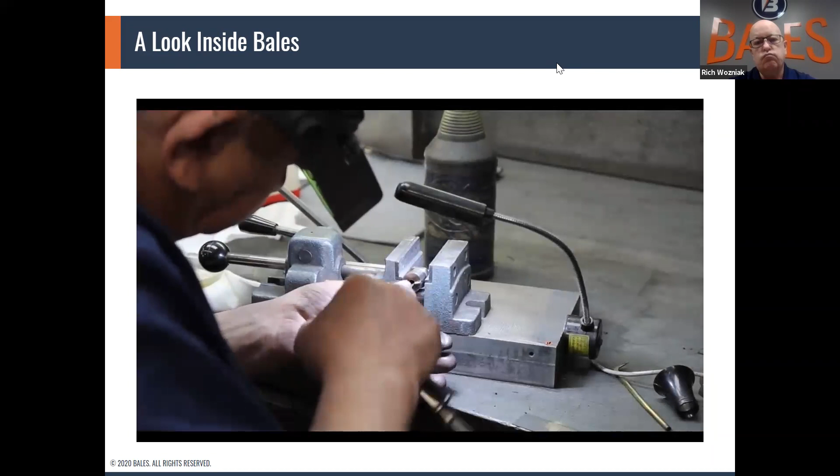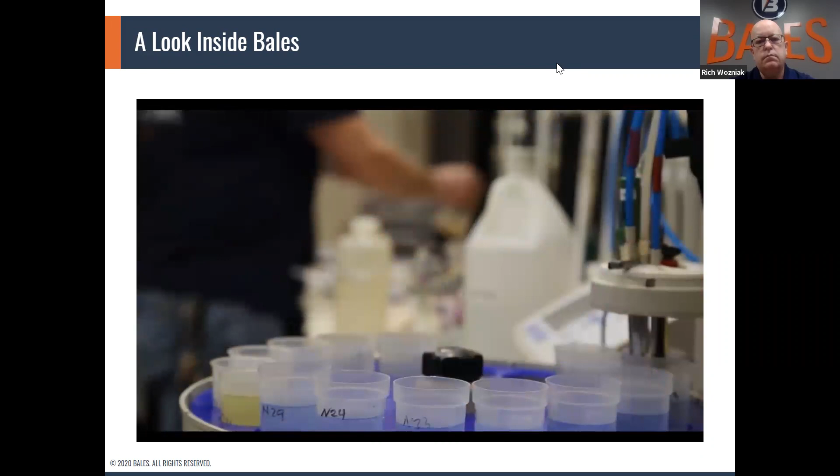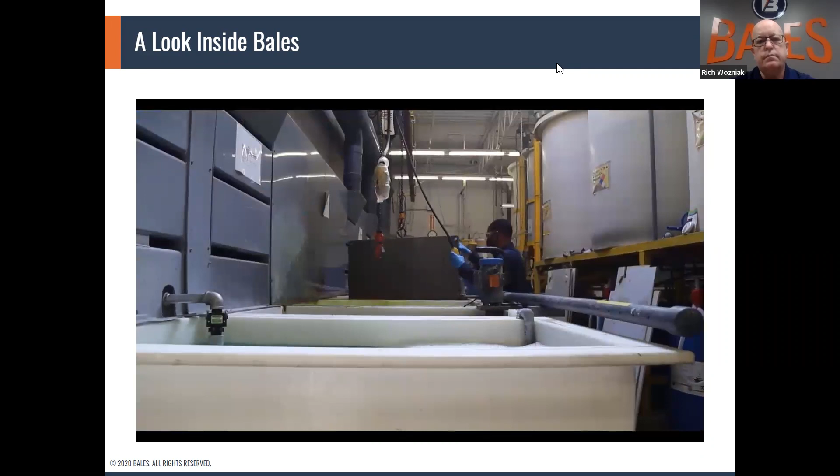Okay, so we'll get into the presentation, the meat of it right now.

Oops, my bad. I'm Stacey Bales, president. The solutions we offer, I apologize for that. I got a sticky finger on my laptop here.

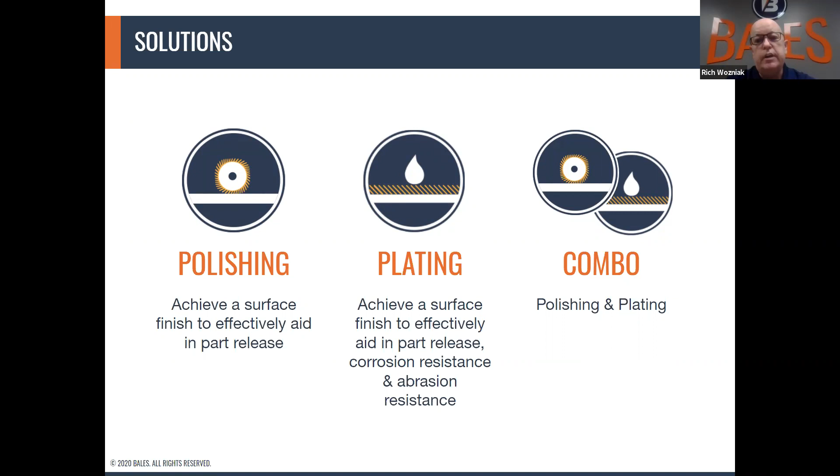What we offer here are some solutions, whether it be polishing, plating, or a combination of both. Polishing, effective part release, or just designed to achieve a certain finish. Plating to effectively aid in part release, corrosion resistance, abrasion resistance, or a combination of both. Some applications, especially materials that we run nowadays, you may actually need the plating to help protect your components.

We'll jump in. Polishing, there's 4 types of polish finishes, from your A1, A2, A3, which is your diamond polish, your paper, which is your B1, B2, B3, your stone finish, your C1 through 3, and of course your dry blast, which is typically a glass bead media as a D1, down to a D3, which could be an aluminum oxide blast. Here at Bales, at the blast end, we can meet any of your needs, whether it be a hybrid mix or not.

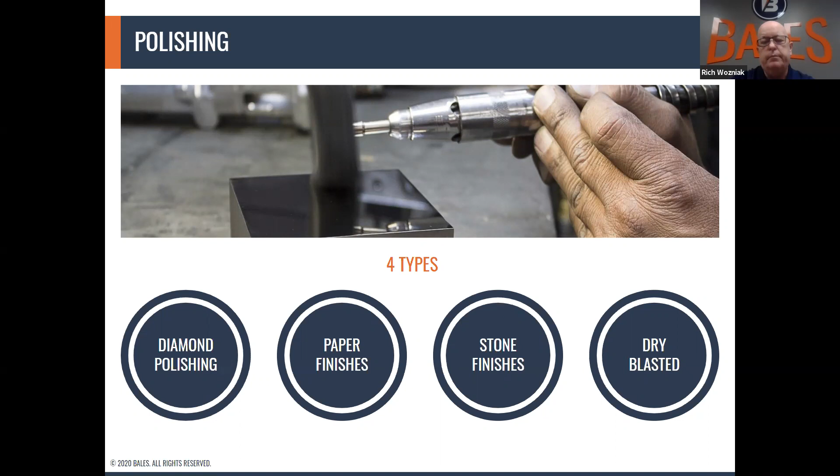First off, diamond polishing. It takes time and skill to achieve this finish. This finish is very technical in nature, depending on where we're starting to get to this finish, whether it be just a straight mill finish or a ground finish, you still have steps in order to achieve it, utilizing the stones to get you where you need to go, and then finalizing with the different types of diamond compounds. This finish can be used alone with chrome or nickel, or by itself.

Some folks don't actually like plating, but with the materials out there today, protecting your substrate is important, protecting your finish is important, and sometimes you may need a combination. It enhances part release, with a nice quality finish, aid in part release is critical. What you see is, maybe you've got a part and you're ejecting, your direction of pull is either horizontal or vertical. You want to, even though it's a high polish finish, still kind of polish in the direction of draw, just to make that part come off even easier, or get the certain finish you're looking for.

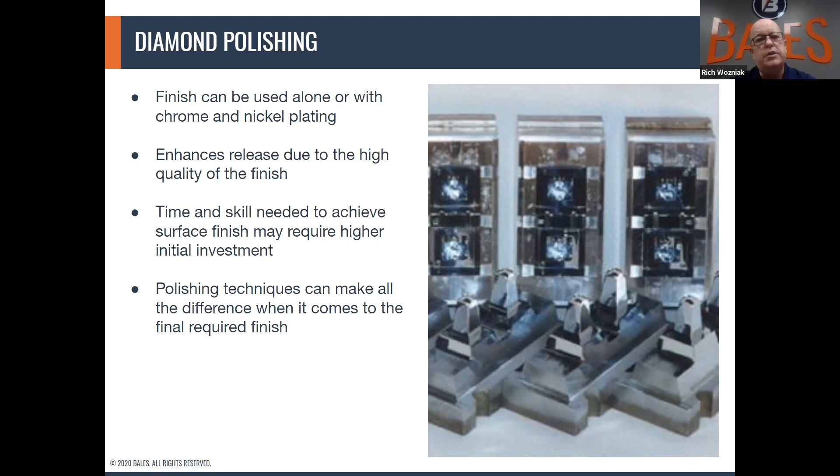But this is the most refined finish, and once again, it's on the A scale of the SPI scale. This finish is also great for, like, if you're running polycarbonate material or other types of materials similar to that. We could easily guide you in the direction of the finish you're looking for. However, we know out there, parts are designed by the end user, and you may not have a say in it. You may be stuck with a certain finish that may not lead towards the proper release you're looking for. But however, we can achieve all of those any way we can.

Next finish would be the B finish, paper finishes. You're basically using different types of grit of emery paper. It's the second most refined finish. This can give you a slightly reflective or glossy look. You've got to be a little careful here, especially if your call-out may specify some sort of gloss level on a part you're trying to hit. So you just got to make sure those things are taken into consideration when you're choosing the finish, whether it be at Bales or even in your own shop or somewhere else.

This also provides good release. It's not as good as your A finish, your diamond finishes, but what can happen sometimes with a diamond finish, you may create a vacuum effect depending on how the part is designed, so it may actually stick more. So there's just some things you need to think about. Usually an expert at a plating or polishing shop can guide you in the right direction and help find what will work for you if your customer isn't calling out a certain type of spec. So we could easily take care of that.

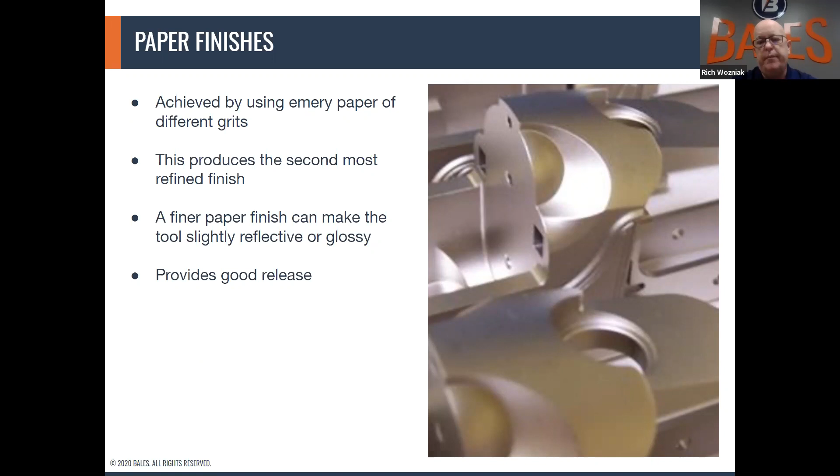Moving right along, the next refined finish is our stone finishes. Now you're in the C scale of the SPI. Me being a former mold maker, this is probably about as far as I can take a polishing. It easily removes cutter marks, things like that. It provides adequate release, however it's not as refined as your B's and your A's. It will give you minimal gloss or shine. This is also good for, say, your non-show section, the backside of your part where it's not visible. It's always good if you can get away with sneaking in a maybe less effective type of finish on the backside of your part.

It's a lot rougher, definitely. But with certain stones that are out there, you can achieve a really nice finish, especially if you have a little part to stick in, you put a little draw polish stone on there. It definitely can help aid in releasing your parts. Also, if you're doing some automation equipment and you have a channel or something, you just need to make sure everything's smooth, kind of get rid of all the imperfections that may have happened in machining, or just blend a transition area. A stone finish will definitely help aid, and say if you're running like a bushing through a feeder bowl into a rail that goes into automation end-of-arm tooling, whatever it may be, it definitely can help you there. Once again, this is non-aesthetic parts, really where you're looking for that stone finish.

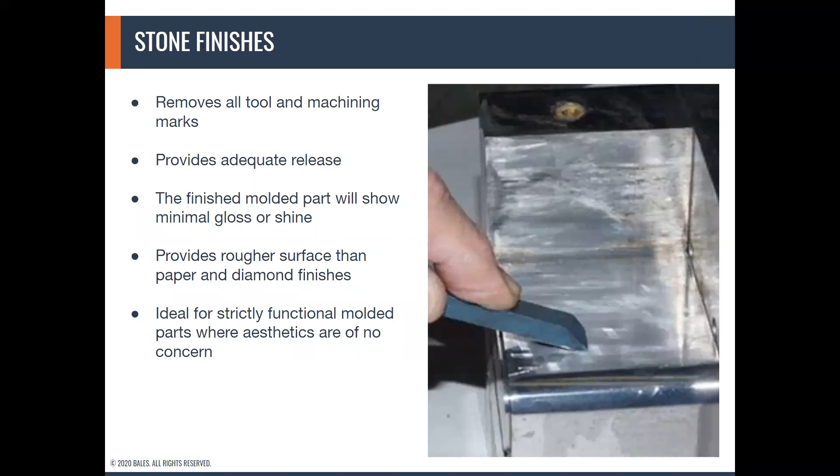Now we're down to the D scale on the SPI scale: D1, D2, D3. There are other blast medias out there. You can almost come up with your own hybrid blend in order to give a various texture or a stipple, or even a look that you're looking for. Typically glass bead blast is number 11, and that's our D1 on the SPI, and then down to a D3 aluminum oxide.

What's nice about the blast is, if you have some machining imperfections, you can easily go in there and give it a light blast and kind of hide some of those imperfections. Maybe you need to run some samples and you don't have time, but you want it to look like a fairly decent part. You can easily put a blast finish on something and then touch it up later or whatever it may be. But it's definitely a really good tool to use for camouflage and some defects.

The rougher the surface, the rougher the media blast, it will act as a kind of part retainer, helping keep that on one side of your tool. You may have a sticking problem where it's sticking to the wrong side, that's a whole new problem. So instead of putting undercuts and detents and kind of scratching up your part or disfiguring it, you may want to just give it a little bit of a bead blast look. This may aid in helping you shift that part from sticking from one side to another, especially if you're running an automated system and you've got end-of-arm tooling coming in there, the last thing you want is for it to stick to the wrong side.

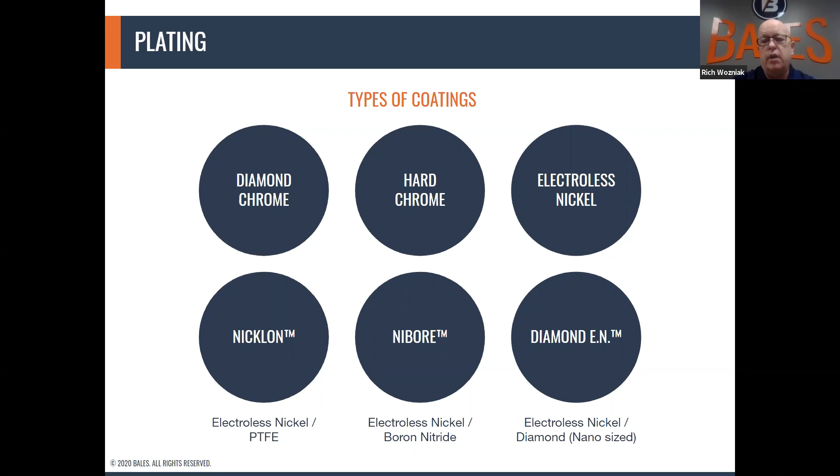Diamond chrome. Everybody's running material that's high glass filled, high fiber filled, 40, 50%. We even got a request where somebody had 55% fiber filled. 85 Rockwell, it's going to take the abuse - let the coating take the abuse, protect your substrate. That's the key here. With all these weird materials out there, you need to protect your investment. Some of these components can cost thousands of dollars, and the last thing you want to do is have to re-weld after a certain wear area. This way, if you identify your wear areas and have a coating on there, whether it be Bales or anybody else's, you can easily strip and replate and protect that substrate. That's the key right there.

Going into it, diamond chromium matrix is co-deposited - like I said, 85 Rockwell, it's an ultra high dispersion of diamond mixed into the bath. What's nice about the chrome, it's only applied at 130 degrees Fahrenheit. So if you have a component, we're definitely not going to distort any of your thin walls or thin pins or any of those details. You may ask, well, how do you run these? The chromes all run at 130 degrees F.

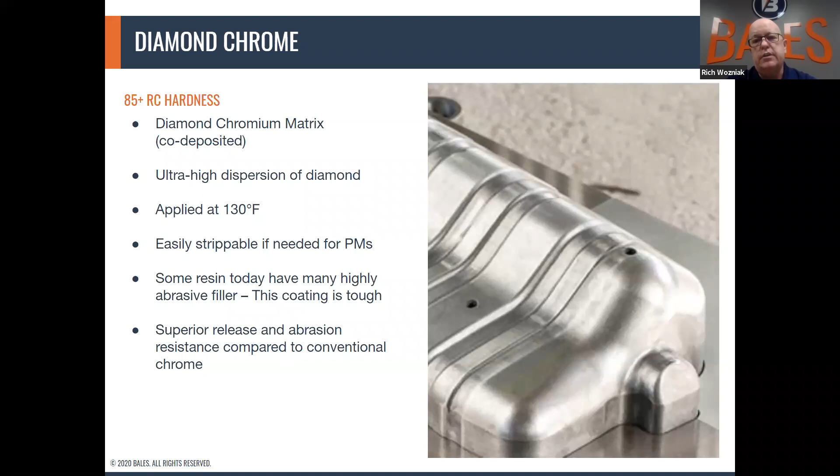Any of the coatings we have here, whether chrome or nickel, can easily be stripped - we can definitely take care of that for you. Like I said, these resins out there today, it's really important to protect your substrate. When I was on the bench back in the day, I used to think if a tool's built right, you don't need plating - if you build it with the right amount of draft and all the bells and whistles, you don't need that. That might have been the case years ago, but today, with the more different materials that are fiber filled, glass filled, whatever it may be filled with, wood filled, you definitely need to protect yourself. It's important, not only with our coatings, but anybody's coatings, to protect your tooling.

What's nice about the diamond chrome, it's also good with release - 0.15 coefficient of friction. It's definitely pretty slick, so it also aids in resin flow if you're running a part with weird areas where your mold flow test may have shown it's hard to get in. Definitely with a coating on there and a slick surface, it will aid in that resin flow, and it may actually enhance your cycle time with your injection speeds, getting it from point A to point B to totally fill out your part.

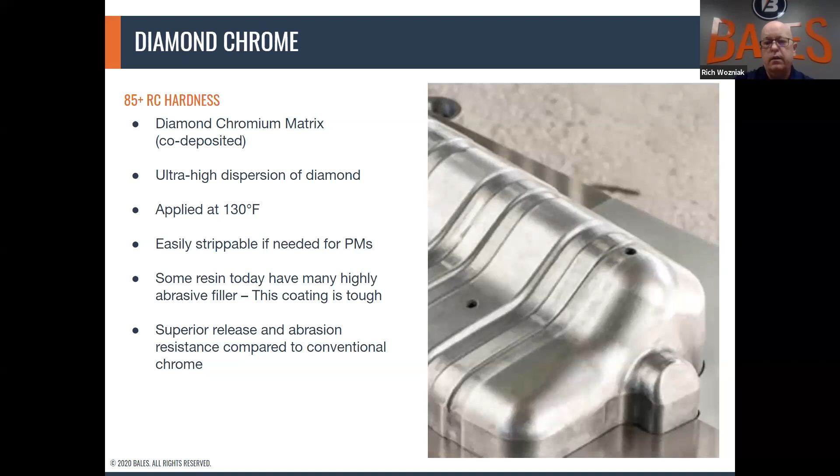Hard chrome, tried and true. Everybody knows hard chrome. Good abrasion resistance at 72 Rockwell. It's nice, it's great. What we like to use it for is flash chrome, to protect your substrates.

Say your tool guy had an oopsie and machined a detail a little too deep. Instead of putting a shim behind a cavity or core detail, you can build up that back with 5 or 10 thousandths per side. You'll have to do some remachining to get it even, depending on the size of the part.

But it's definitely something. Being on the bench, I've been at places where they had a bunch of shims, and it's like, why not plate these? Why not weld these? Shims fall out, they stick to grease, those type of things. You do a little buildup on the backside and now you don't have to worry about that. You can assemble your tool, you're race ready. Now you don't have to go, oops, I forgot that shim, and now we shot the part and have a step around a pin area, whatever it may be.

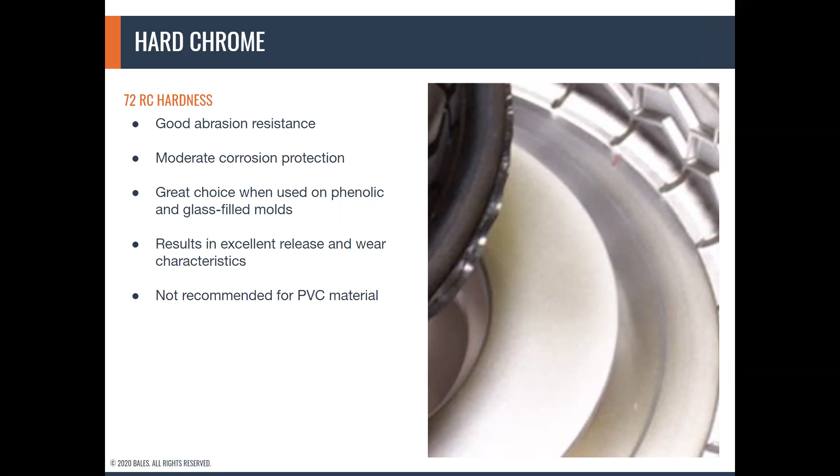This provides excellent release and wear characteristics. One thing to note: PVC material, chrome and diamond chrome don't like each other. So it's important that when communicating with any plater, or here with us at Bales, you tell us the type of material you're running. A lot of times what happens is we may forget, or the customer doesn't even think about it.

And now all of a sudden we plate this $2,000 plating job, and then you say, hey, the plating failed, and then we ask, well, what kind of material are you running? It's important that you let any plater or shop you deal with know the material you're running, if you know it offhand. I know what happens a lot of times, you may design the part to run nylon.

Then the customer changes their mind and now they're running PVC. That happens, we get that. But it's always important, the more information you can give any plating organization up front, the more it helps minimize the reworks and the bad taste in your mouth, those type of things. We want everything done correctly from start to finish.

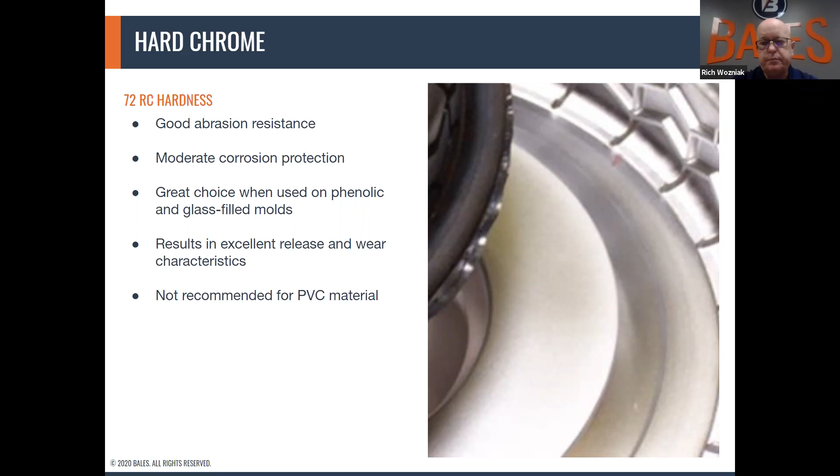So as you know, with chrome, we have to build a conforming anode. As you see in the picture, the anodes, we want to direct the chrome onto the part surface. You can see in the two where it just looks like a big jumbled mess. That's actually every little individual wire built so that we can get complete coverage on a block that's, say, 36 by 30. It has that much detail.

Or you can go to the picture in the middle with a simple ring. They want to build up on that diameter, they machined it wrong, it's a simple ring. But however, you need to build an anode for chrome. And what typically happens with chrome, the more you put on, the more the likeliness you have edge buildups or those little pimple balls, or whatever it may be.

So it's important that you spec out your dimensions properly, give us the right material, and we can move on our way. And then of course the picture to my left is just a simple anode that may have taken maybe an hour, but the cost driver really in chrome plating is building the anodes. The one with more detail, I think that was a 40-hour job. So you can just imagine what it takes to do that.

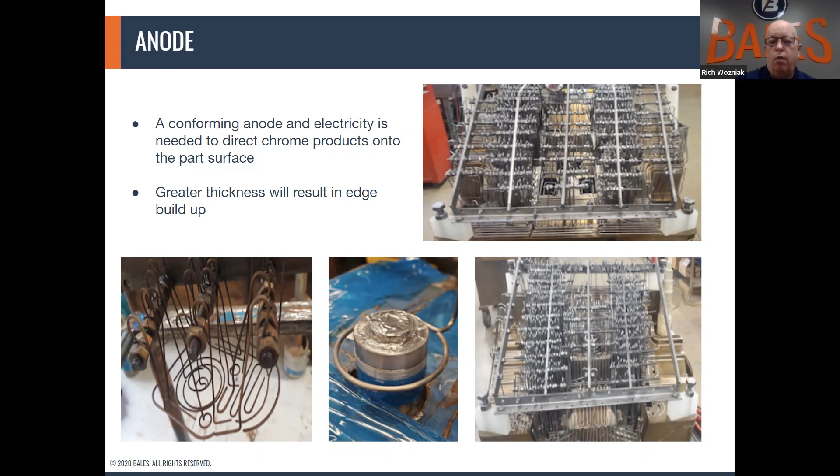So moving out of chrome into nickel, here we go. Electroless Nickel. Excellent for corrosion protection, better than chrome, especially if you request high phos plating. High phos is the way to go for corrosion protection, same with oxidation. Gives you a little bit of abrasion resistance.

Typically applied Electroless Nickel, you're sitting somewhere right around a 50 Rockwell. What's nice about any of our nickel products, which we'll go into the other three shortly, is it flows evenly everywhere. So you can almost guarantee the size of the part, you're going to be within 50 millionths or even a tenth from top to bottom, deep walls, wherever it may be.

What's also nice about nickel is you don't need an anode. We can simply rack it and run it through our tank process. It's a little more detailed than that, but it's that simple. We just don't dip it and hold it in our hand, but we do build racks and run these things through. It flows evenly everywhere. That's the key, especially in those hard to reach areas, deep walls, deep pockets, deep ribs, things like that.

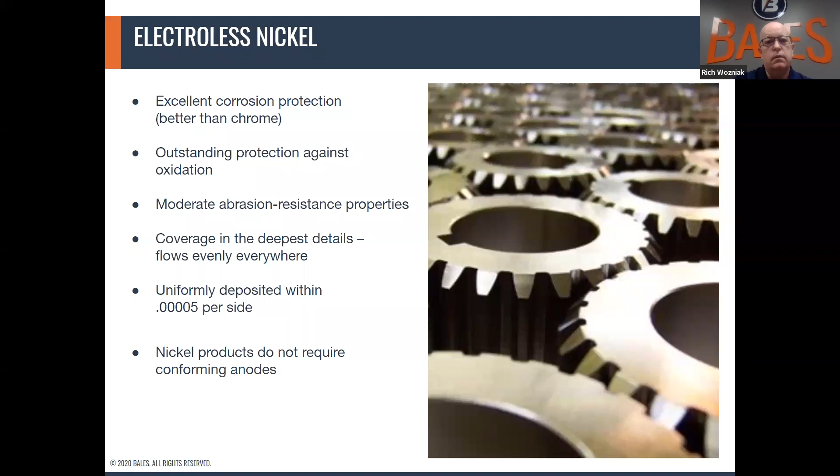Nickel Teflon: excellent corrosion protection, pretty much the same as Electroless Nickel. What's nice about the Nicklon is it's great for your LSR and rubber molds. Back when I was in a previous life, I actually worked at a place where we sent our liquid silicone tools here to Bales to have our gasket trails coated with nickel Teflon, and it was a lifesaver. So it's just something to think about.

It's also good release. It's been around for a while, one of those hybrid coatings. However, it really stands out, especially with your LSR and rubber materials. Once again, evenly deposited. It is a release coating, so it definitely will help on parts that are difficult to eject, or parts built with no draft, because that happens. And it extends mold life.

Any of the coatings, any of our coatings, anybody's coatings, will definitely protect that substrate, and that's the key here. You guys spend thousands of dollars on tooling, whether it be molds, dies, automation equipment, end-of-arm tooling, grippers, pins, whatever it may be. It all costs money - one, the raw material, two, the shop time, then the time for assembly, and then the time you run it. So it's important that you build a quality tool and make it last. We have some solutions, and so do other platers, to help protect that.

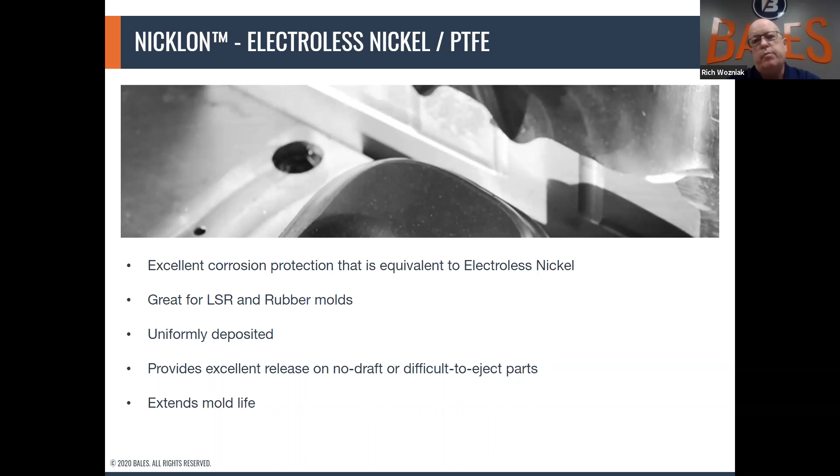Electroless Nickel boron nitride, our NIBORE. What's nice about this is now we can add a post-bake option to it. NIBORE, as applied, sits around a 54 Rockwell, which isn't too bad - it's typical of most steels that are heat treated. Also, if you post-bake it at 550 for 3 hours, now you've achieved a 67 Rockwell. As you saw in the earlier slide, the hard chrome is a 72 Rockwell.

So now you've got excellent lubricity at a hardness that's near the hard chrome, and here, without building an anode, it's going to flow evenly everywhere. That deep rib, that pocket - it's going to go in there, it's going to cover it. Where with the chrome products, you may run into the fact that you don't quite get full coverage in a corner. And everybody knows that the one spot that you don't get the plating is going to wear first. It's just going to happen. It's the nature of the beast.

We try to cover simple jobs in chrome easily. However, the nickels flow evenly everywhere. And in our next slide, it'll even be more beneficial to think about if you're doing something with chrome and you have some details that are a little tricky to get to.

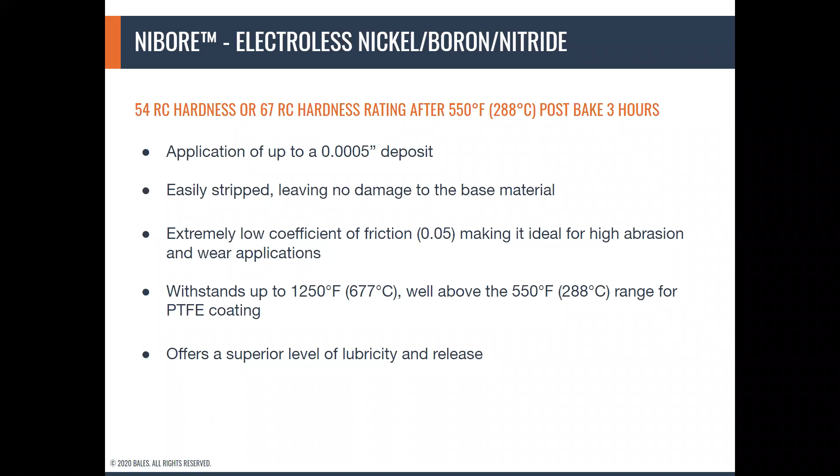Once again, easily stripped - any of our coatings we can easily strip. This is an alkaline strip. It may be time to do your PM and we could strip and replate it. Or, if you still need to do a PM, you got a little bit of damage, you may want to grind, machine, or even stone a certain area, maybe weld where you got a ding or something, then send it to us and we can strip and replate all at once. Depends on logistics - it's kind of your call. It's just something to think about.

I know nowadays everybody needs everything yesterday, and typically a plater or polisher, we're last in line. So we understand the urgency. However, it seems like everybody's got an urgency these days. So it's just something to think about.

With it being that 0.05 coefficient of friction, it is very slick - it's the slickest we have. Most of our business, mold components looking for release, is NIBORE and nitride. What's nice about it too is it can withstand 1250 degrees F. So you're running a mold and all of a sudden your cal rod heater ran a little rampant - you're definitely going to probably still have those properties intact.

Now if you had the nickel Teflon, that can only handle like 550. So if you get something that goes a little out of whack, you run the risk of typically destroying those Teflon properties of that coating. So it's something to think about.

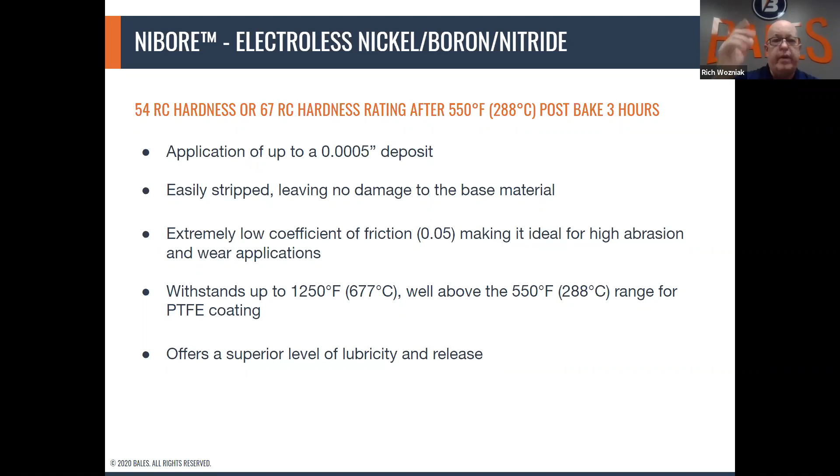Diamond EN, as applied, is 57 Rockwell. So here we're almost at a nice hardness just as applied. However, that post-bake option gets you 70 Rockwell. Now you're right there with the chrome.

It's definitely the way to go, especially if you've got deep ribs, pockets, thin walls, hard to reach areas. What's nice about it too is now if you have a large block that has a lot of detail...

Example is that anode that we showed earlier with all that wire bent. Now you don't have to wait the time to have the anode made, especially since timing is everything. Typical lead times are about a week for our Diamond EN, and then chrome can be upwards of 2 weeks or more, depending on the anode construction. Timing is everything, and if you can get away with the Diamond EN material, it's definitely something to think about.

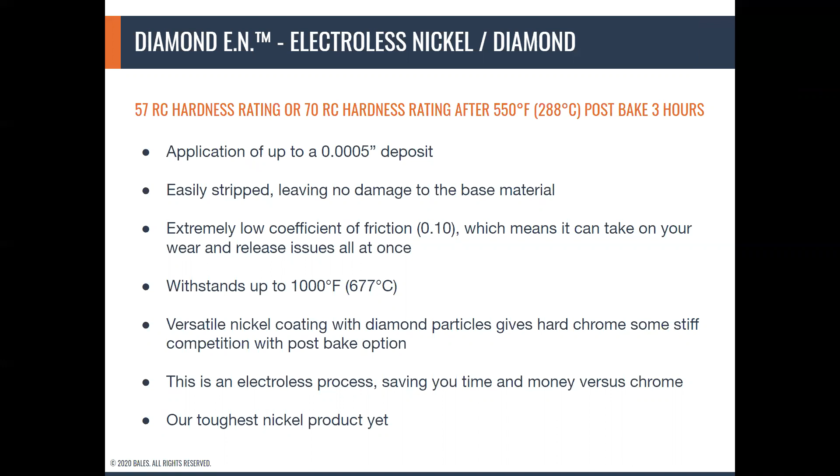Easily stripped, like always. Low coefficient of friction, 0.1. It's pretty slick, not as slick as our NIBORE. However, it is excellent for release.

Withstands up to 1000 F. So once again, if you get that rogue heater rod or something that goes a little astray, it's definitely going to hopefully withstand that.

You also got to remember, these are only surface coatings, so they're only applied on the surface. Your rogue setup tech with a screwdriver instead of a brass pick trying to pick out a part, if he hits it hard enough, you could damage the surface. Ideally that never happens, but it's just one of those things you have to remember, that this is only on the surface.

Once again, it's an Electroless process. It saves you time and money. This is the toughest nickel product we have here.

Also, typically with the nickel products, we like to stay around the half-a-thousandth deposit. We can go a little bit more, a little bit less, however we like to stay in that range. Ideally, we would love to just put 2 to 3 tenths per side on everything.

However, sometimes you've got a tight fit area and now, hey Rich, I only need 50 millionths, that's all I can afford. So yeah, your longevity and the life of your coatings may be compromised a little bit, however we definitely can take care of that too, and it's just something also to think about.

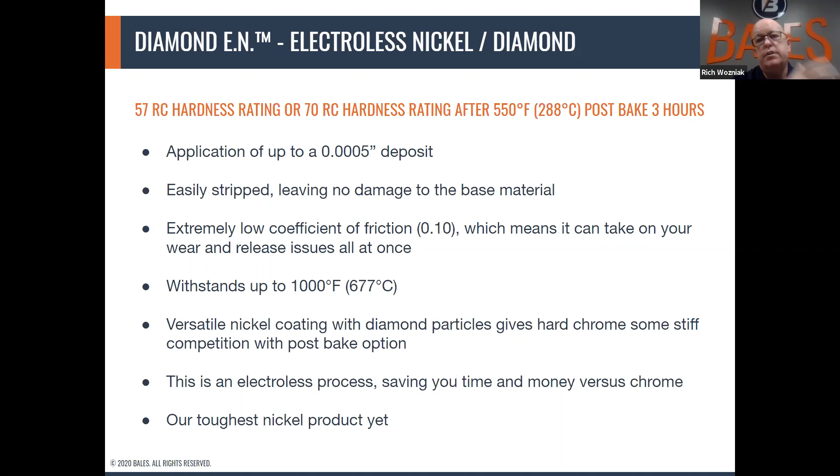Aluminum and beryllium copper, soft substrates. Everybody uses them right now. I mean, aluminum is easy to machine.

Those aluminum shops that are out there, the prototype shops, they can guarantee you a tool in 2 weeks, whatever it may be. What's nice about that is you can take an aluminum tool, put one of our harder nickel coatings on there, say Nibor or Diamond EN, and now you've extended the life of that prototype.

Your customer says, okay I need 30,000 shots, and you still got 8 weeks before the tool's built, or whatever it may be - I'm just throwing out numbers. Extend the life of the prototype tool.

Also, it's been known that folks are building aluminum tools and just coating them to extend the life that way, or convert that prototype tool into production. Now all of a sudden you've built the tool and budget constraints happen, and now they put a kind of a stop on it, and now you can run that aluminum tool, put a coating on there, and definitely make it last. We have a couple customers that have over 7 million shots on an aluminum tool that's been Nibor coated.

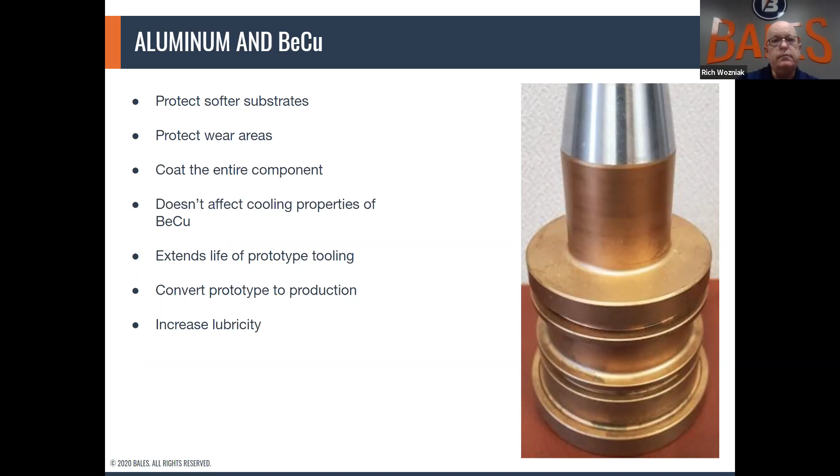So we actually put an Electroless Nickel coating on there, cleaned it as good as we could, protected it until they were able to build some new cores. Then we coated Electroless Nickel on those water channels. Not only can you use it on water channels, but your water lines. If they're large enough, we can submerge the entire part into the tank. It's definitely beneficial to coat those.

Not everybody runs the best cooling system in their tools. Everybody says, oh, the glycol is where it needs to be and those type of things. However, sometimes those things get overlooked, and then you go to do your PM or whatever, or you start to see a water leak, and now you've got a new nightmare.

We do stripper rings, automation parts, end of arm tooling. What's nice about the end of arm tooling is typically on a robot you want it light, so you're building stuff out of aluminum, especially the grippers. You're pulling parts off - some folks use vacuum, but I know of some folks that actually use grippers. Put those with a Nibor coating.

Now you help protect that substrate, get a little more life out of it. In a past life, we machined our own end of arm tooling grippers, and we actually coated them to extend the life of them, instead of buying them off the shelf - just protect it.

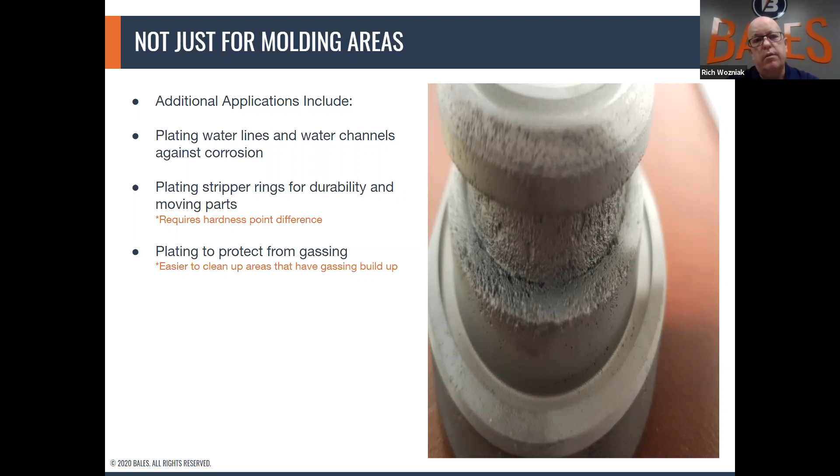Stop it before you have to start welding tools, and then welding and re-welding and cutting and all that good stuff, back and forth. If you keep welding something, it's not going to hold up over time. Then you're going to have to reinvest in either an insert or whatever it may be, and now you've extended the cost. Protect that substrate - I can't say it enough.

So you don't want the coating in a certain area - we can easily keep it out of holes, especially knockout pins. We can easily put some neoprene plugs in there, or you have that cavity block and the retainer block that's tight, and you can only get maybe a tenth or two in there.

Masking, we can do chrome. We'd use a tape - typically a 3M type tape. There's several different types of tape depending on the location of where the plating is going to be, and further down on the part or whatever it may be.

However, you got to remember it's a brushed-on process, so now it's usually 2 layers. Just imagine somebody with a paintbrush - it's going to take some labor, it's going to increase the cost. So ideally, if you can plate the entire component, say that 2 to 3 tenths per side is the way to go - now you've got protection everywhere.

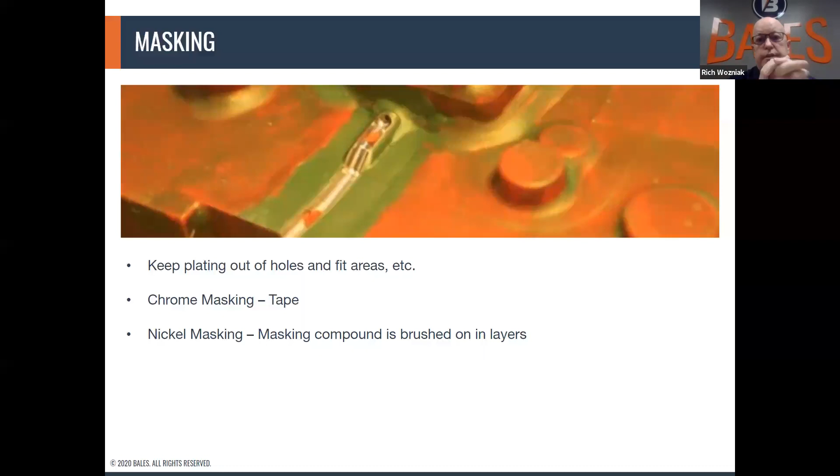But however, we understand inserts, fit areas, pockets, things like that - you don't want them to flash, you don't want any issues, you don't want any slop, whatever it may be. Definitely something to think about.

Typically what happens with all of our jobs, we run a small 1-inch dull razor coupon. This way the chrome plater or nickel plater can take that off the line and verify the thickness being plated, the rate they're plating, so we can target your desired thickness. If it's a small enough component, we can also put it underneath there ourselves.

As long as we know the proper substrate - a lot of folks don't know, they just say it's carbon steel, but if say, hey Rich, it's H13, we can plug in H13, put it under there, x-ray it, and now you see we've got 2 tenths, or 2 tenths and 2.5 tenths, whatever it may be. We can definitely do that, and a smaller part can fit in that footprint, which is a small area.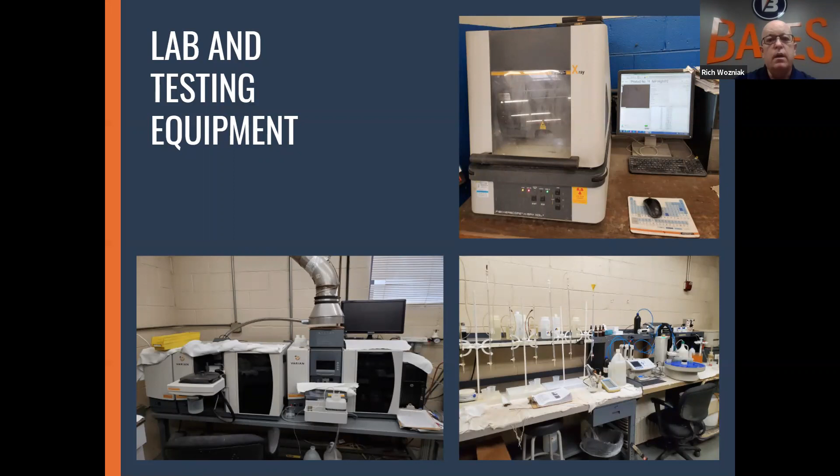Well, we are at the end here. Is there any questions or comments or concerns?

Hey Rich, Patrick had a question about what type of steels produce the best diamond finishes. Well, typically your tool steels, but there are some you've got to be careful of - your H13 and P20s, depending on the grades. You'll want to look at that. I do have a cheat sheet that I can send to him if you get his information. Okay, yep, I have it. Perfect.

Any other questions, comments? You can... I hope I didn't bore you. Turn your mics on. Oh, that helps.

We just wanted to take today to give an overview for National Surface Finishing Day of what we do at Bales - what a nickel process entails, or chrome process, or even the polishing. If interested, we can also dive deeper and do a more specific presentation. Maybe not - I know this speaks more towards the mold making end, because that's where my expertise is.